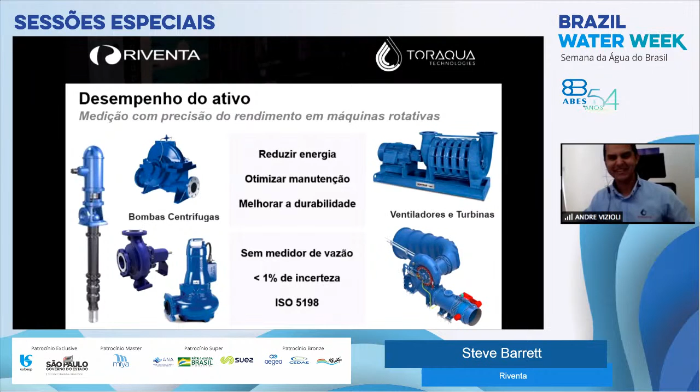But our great benefit is the level of certainty that our test has. We have a lot of accuracy. We can be very confident in what we are delivering. I can tell clients that after I measure, I'm 99% sure what has been done. This is very helpful in decision making.

I'll show all slides. This is the main challenge we face. A major portion of our clients already familiar with hydraulics and energy are struggling because we know that 90% of the largest cost of any water operation here in Brazil is power, electrical power. When it's not 95%, it's 70%. The main consumer is usually a pump. We know pumps are the main users of power.

So what do we do? From our experience, we know that our clients know how much they're paying. They go into the free market, try to reduce the rates they're paying, and they have mastery on that. When we go one level beyond that and think about stations and plants, due to energy metering, we don't know if we're measuring the wastewater treatment plant or the pumping plant, so you're not quite certain of the power consumption. And if I go up yet another level, how much is the pump, in fact, consuming in terms of power? How efficient is it? Usually we don't get an easy answer.

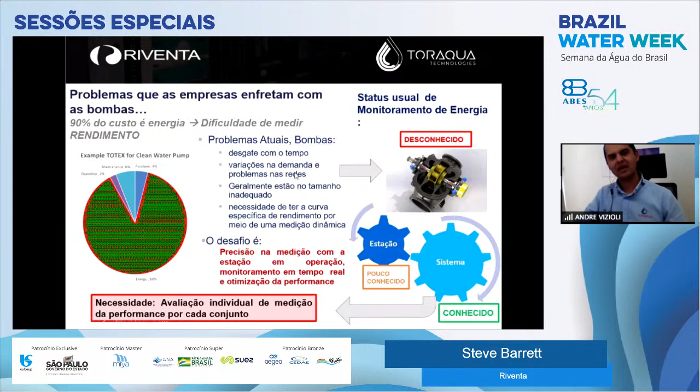So the result of all these variables that are kind of obscure in our daily operations is to individually assess the high pressure pumps, the water pumps, because the benefit is reducing the consumption of power.

We have several types of measurement. We use the conventional method, which is provided by all pump manufacturers. They measure power, they measure the flow, the height, the manometric height, and these are measurable variables, and the others are constants. This is done in a controlled environment. It's easy to do. They have mastery of it.

Doing this in the field is not as easy due to issues of accuracy. The accuracy you need, and you go to the operating side, you have to turn off the pumps because you need a single piece of data in terms of flow. This makes it so difficult that clients are not trying to do it. It's so complex, you bring together 3 or 4 teams to get it done. You need to measure it in operation, make the test available, reduce supply, and this might make it unfeasible.

Our experience shows that clients do not perform this type of analysis. And it's so important, since it's very important in terms of power consumption. And we know that pumps represent a large portion of the energy.

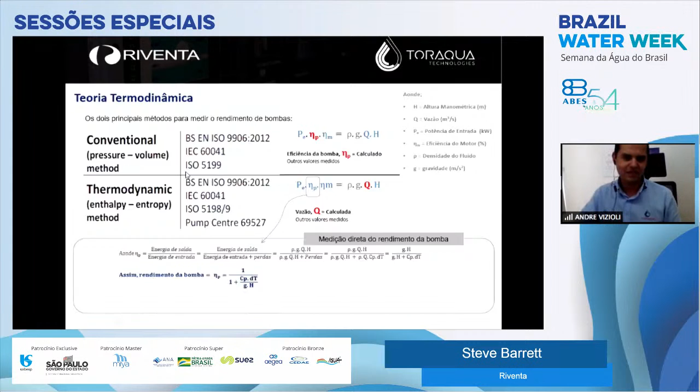We install everything in parallel, the power meter. This is easy to do in the field, and it's quite accurate. We measure the motor yield, and I'm measuring the pressure to get the yield. It's the same with the pump head, calculated by the software. Then I calculate the flow, measuring yield to calculate the flow.

So what is the result? We see pumps with a lot of wear and tear that have very low yields, under 40%. We've measured hundreds of pumps in our experience, and pumps are operating at 60 to 70% yield.

They could reach 85%. We have raised the banner with Riventa to talk to manufacturers and maintenance companies. We are moving forward with this idea, and we started to find out that pumps are very strong. They can operate out of their range and still work, but now we can identify that there is wear and tear, or that it's out of its range.

This is our range of products. We have a portable meter for predictive measurement to check pumps individually. We have the temporary meter. We can measure all pumps, analyze the curve for the system, and do analysis to optimize the plant. We can get a larger data cloud in a few weeks and work to optimize it.

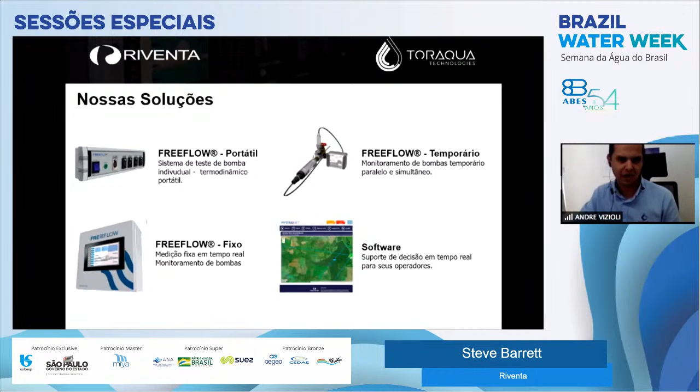So we have 2020 vision to reduce 20% of the electric bill from a water company. This is the view we have, and this is how we like to work, this is how we like to look. We focus 20% on the larger pumps with a goal of 20% reduction in the costs for power.

As I mentioned, we focus on OPEX, which are operating implementations, getting the pumps to have the best performance possible, alternating their mode of operation, and showing it so it's easier for the operator to be sure they're doing the optimal. In a second moment, with investment CAPEX, we start remodeling the pumps, replacing or rebuilding them.

In general, our methodology is identifying pumps that need to be refurbished. We provide power savings, and we maximize the durability of the asset by using preventative maintenance. This is something that goes by if we're not measuring. When we measure, we not only reduce the use of power, we also have more maintenance of the asset.

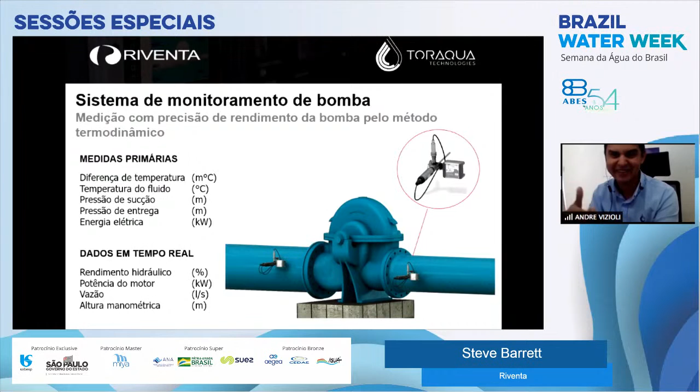So what are the primary measures? Temperature difference, fluid temperature, suction pressure, delivery pressure, and energy input. What is the data you will get in real time? You can get the hydraulic yield individually from each pump, which is the great trick to get that on the operating pump. This is how we can save on maintenance. The power of each pump, of each motor, the flow rate, and the pump head.

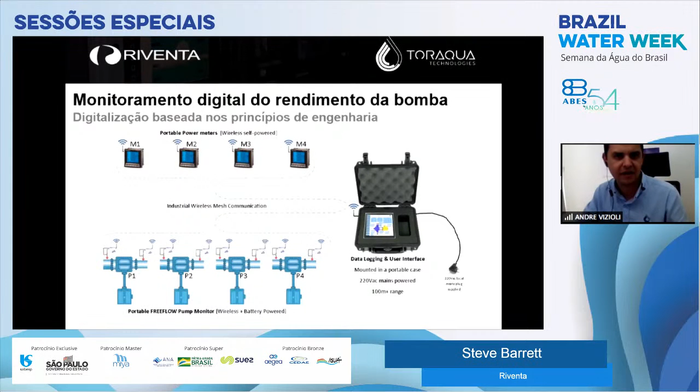This is a portable installation, so this does not require them to have the measurement permanently. For the client, we can take them, we can install the probes. I take it to a data logger. This data logger concentrates data, but it also sends to the cloud, so we can start working on our servers. Here's a picture of a fixed installation, or as real as possible.

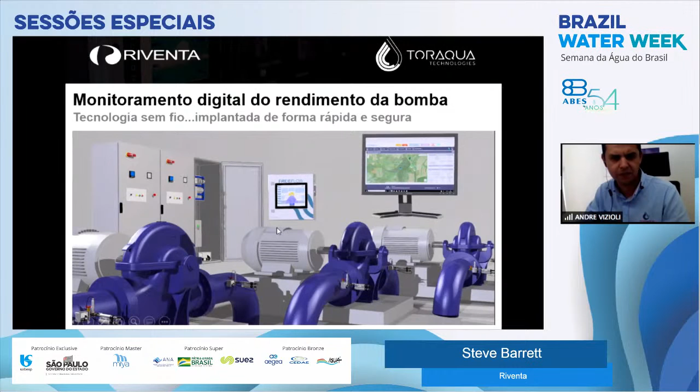The probes on the water pumps, the radios with the measurements - you can have that either on your station or on the cloud with the HidroNet software, everything by Riventa. You would have a login and password to get all the information, and also when it comes to the operation of these stations.

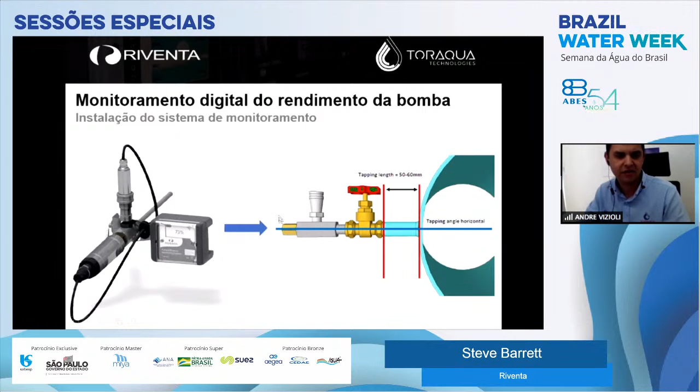A few more details: we have tapping on a valve. There's no cables. We are quite flexible with the installation as well.

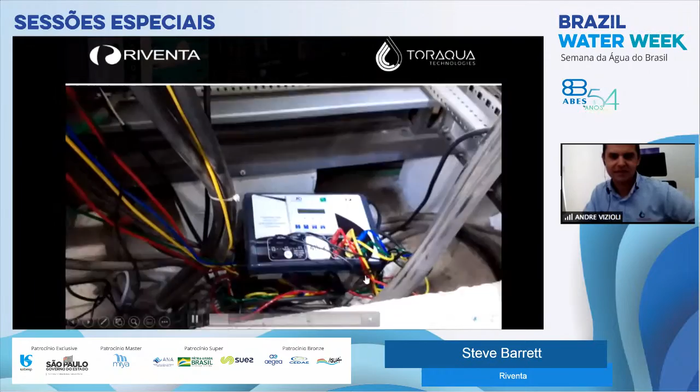This is a very brief video I'd like to show, and so for any questions - this is a power meter installed in the panel with a radio communication. This meter is sending information to the data logger, as I mentioned.

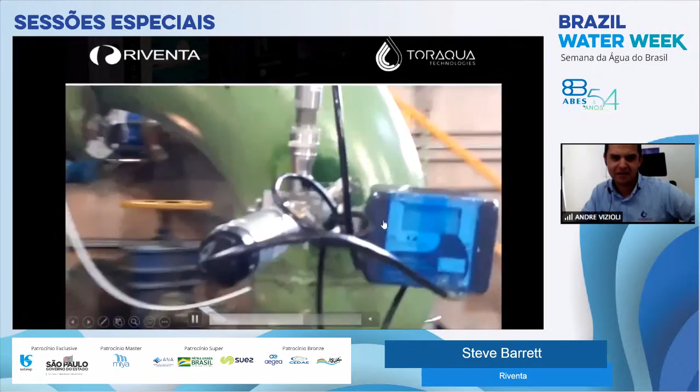I'll just skip ahead a little bit so you can take a look at the equipment. You can see how simple it is. Here is the installed equipment: radio, the probes, as I showed in the picture. The setup is really easy, really simple.

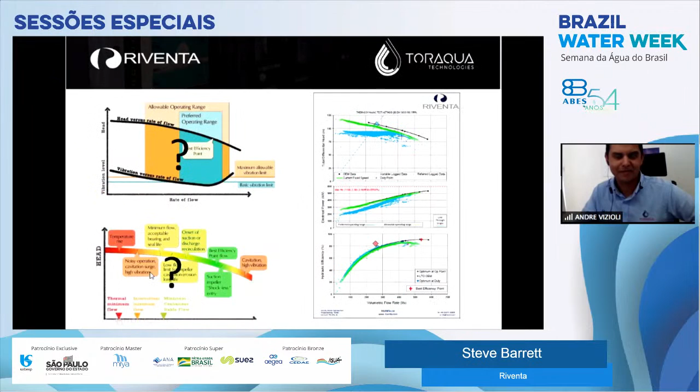But why should you do this? The idea is to identify what you see here. On the left, I wanted to show the pumps - they are not in an optimal operating range. We try to get the pump to remain in that range, the optimum range.

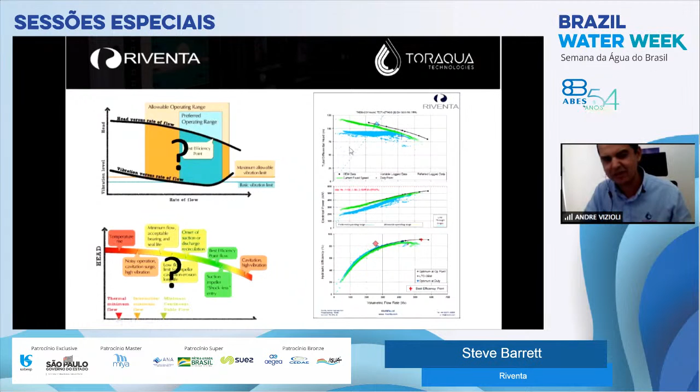What our measurement identifies is these green curves. We can see that they are not operating at a single point. On the left I'm showing the ranges they can have when they go beyond the optimal point, or the point that is being specified here - it is inefficient. This is our measurement. We can notice that this pump, a lot of the time, is outside its optimum range.

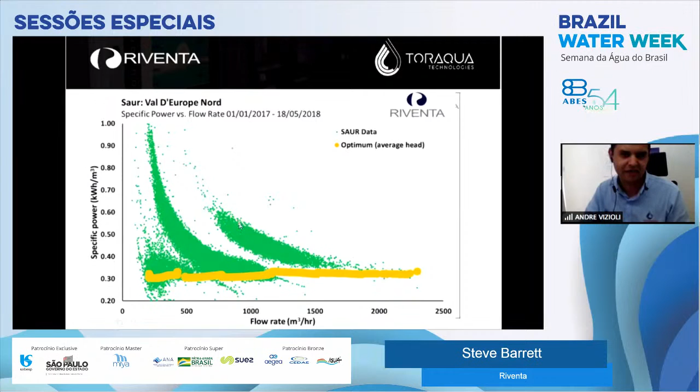This is the consequence of one pump. When I look at the whole system, I have a mass of data we could use. This is a graph in kilowatt-hour per cubic meter. So when we start optimizing and using this, I can drastically reduce the pumping costs, so all this green mass will be closer to the yellow portion.

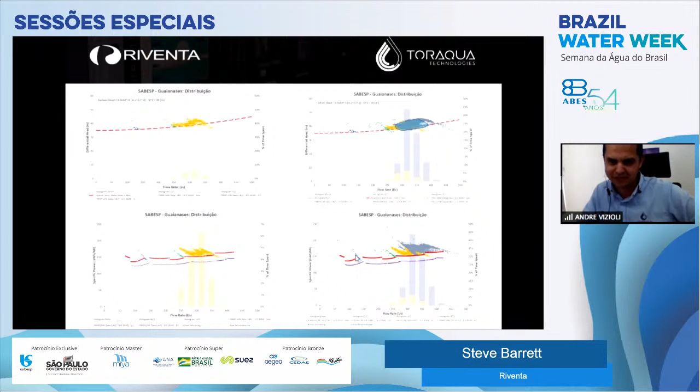Here I have another example as well, from Sabesp, very similar to what you're seeing here. I'll go a little deeper into this detail, but I'll be quite brief. On the y-axis we have the kilowatt-hour per cubic meter per flow rate. You see that the client here could operate in the red range, but is operating... you could operate in the red or the purple. That's what we identified there, with an increase of 12%.

Excuse me, André, I had to do that, but you have only another couple of minutes.

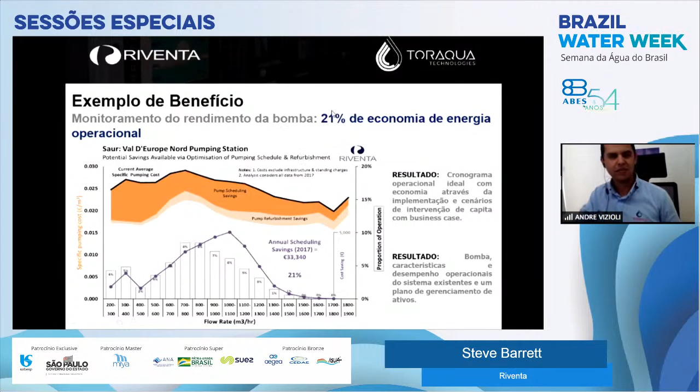Matter of fact, this is very similar to that graph I showed you earlier from Sabesp. In France, you can see specific numbers by flow, and from work that was done by us, 21% in energy savings - very similar to what we did here, except that it was operational there, not on capex. So it's a little bit more over the system.

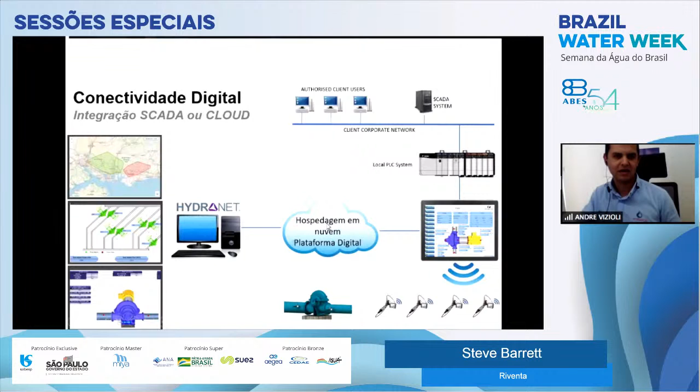You can have it fixed, like I mentioned, it's structured, and it can be turned on like that. You can plan, manage it, monitor, and then launch a report, and that can really solve a lot of your energy consumption problems. So I'd like to thank you.

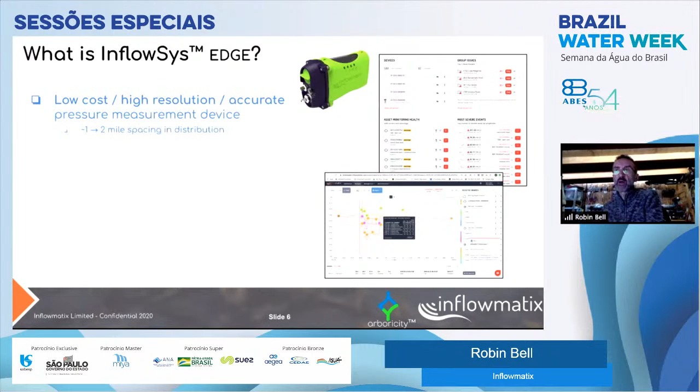These are distributed in distribution systems in 1 to 2 mile spacing, and in trunk systems in around 3 mile spacing. They're very fast and easy to deploy. There's no peripheral equipment, no additional equipment required. It takes less than 5 minutes to go through a sequence to get these connected to the water network.

Why do we call it Edge? The Edge provides intelligent, autonomous analytics. The analytical solutions are on the device, and this differentiates somewhat from the competition. What we wanted was to have that capability close to the edge of the network rather than relying on our cloud-based solutions. This gives us some advantage in speed of response and reacting to situations in the network. As I mentioned, we have this cloud-based application to give these insights via what we call a network narrative. You can see a couple of quick screenshots on the right from our application.

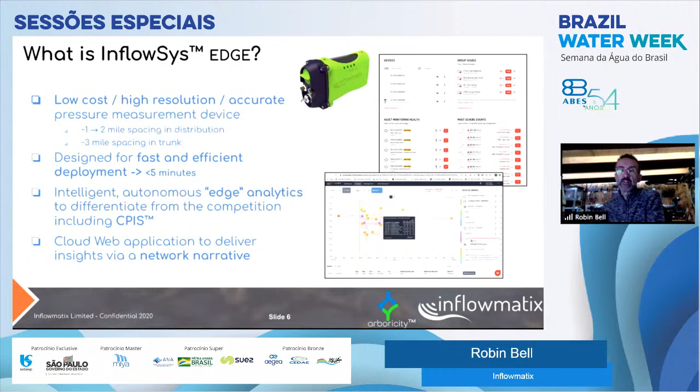Moving on, some indications of what we do: event alert reporting. This gives instant feedback on what is happening in the network. Managing those events is very important, because what we believe very strongly in is providing outcomes to our customers, not providing lists of thousands upon thousands of alerts, which really get ignored. So it's very important to give good management.

We integrate into corporate systems at whatever resolution a company requires. This means that rather than relying on our systems as a scale up occurs, the company can use their own systems to bring the information from this and other attributes into play. We're very skilled at doing those integrations, and we've done very many, particularly over the last 2 years.

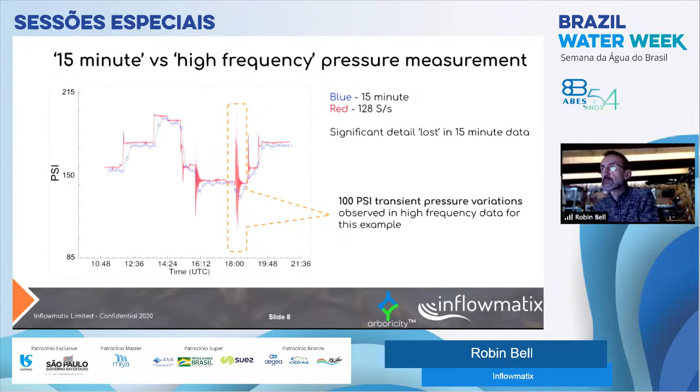So I've shown this in PSI. Similarly, in meters of water, this is around 70 meters of water. But those are lost with standard telemetry.

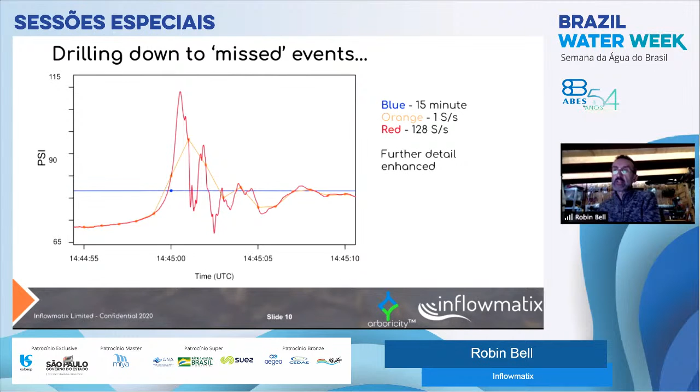Also, just using 1 sample per second data provides some information, but actually you need the full resolution by oversampling at 128 samples to reconstruct a waveform. This could be a typical pump surge type effect that can easily be created and needs to be seen to be understood and corrected.

So we have this metric CPIS, and I'll come on to define this in a little bit more detail. However, in doing burst correlations, typically customers around the world, water utilities around the world have used age, material, climate, and soil information to feed into those burst correlations. More recently, pressure, mean and maximum pressure have been used in those assessments, those models.

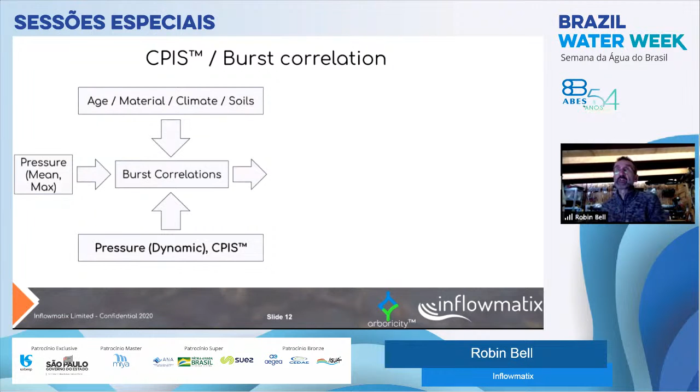What we bring is dynamic pressure variations in this metric called cumulative pressure-induced stress, which is a way of us accumulating the pressure information into a useful metric which indicates performance on the network.

So what was very interesting for us, we showed a correlation between the high volatility in the pressure domain in the network with burst records from over a 10-year period. It shows that although water systems change, the correlations remain in terms of those high pressure dynamics. So it's a very important element of understanding how water networks are performing. Obviously, we're trying to drive those down, and you can achieve orders of magnitude improvements.

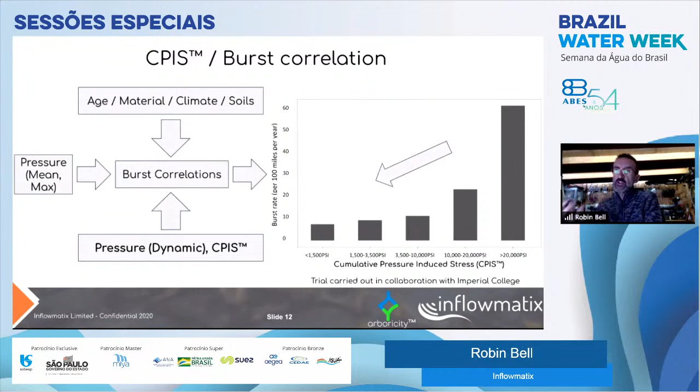So just a quick illustration before I go into some case studies. What are we doing that's different? We're gaining insight from analytical solutions. What we believe fundamentally is network hydraulics are the key to understanding how to resolve problems. We don't rely on just artificial intelligence. This isn't about lots of data sets, it's about the right data sets to get the right outcomes. We continue to work closely with Imperial College, one of the top 10 universities in the world, and we have a number of strategic partnerships. Suez has a minority interest in Inflowmatix, and we collaborate on these network solutions across a significant network for them, over 200,000 miles, 300,000 kilometers.

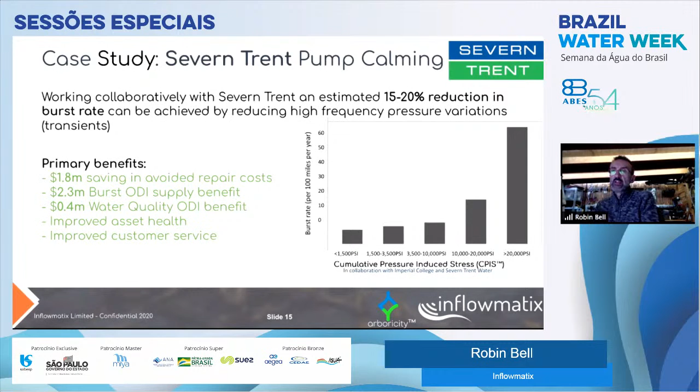So I'll talk about some of our use cases here. I showed this plot before of Severn Trent, and we did some pump calming activity with them, and we showed huge benefits. I've shown these in millions of dollars as an equivalent to the UK pound, and this was presented to the board of Severn Trent, and they saw the benefits and continued the rollout of our technology.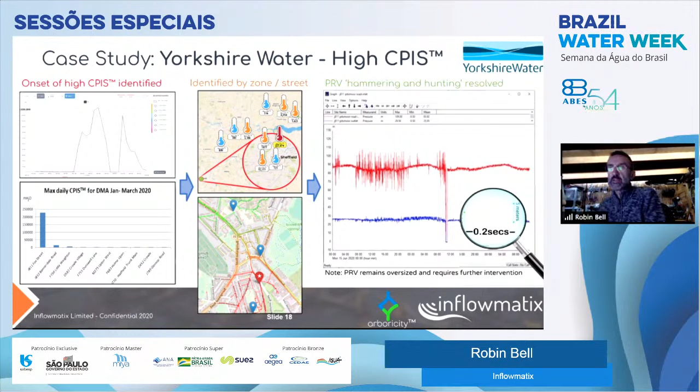Thank you. So this illustration shows where we were able to show in the network the onset of high cumulative induced stress. This shows 220 PSI variations in the network over a 24-hour period, an accumulation of smaller variations or some large variations in dynamic activity. The network was working fine, and then at a certain point this cumulative pressure-induced stress was seen to increase dramatically. We were able to work with Yorkshire Water to identify the zone where this was happening in the north of England, then use accurate time stamping to localize this down to a particular street. It was identified as pressure reducing valve hammering and hunting. This was resolved, but not fully, because looking very carefully at variations in the network using this high frequency, you can see there are still variations which need to be mitigated. But the major issue was actually resolved here.

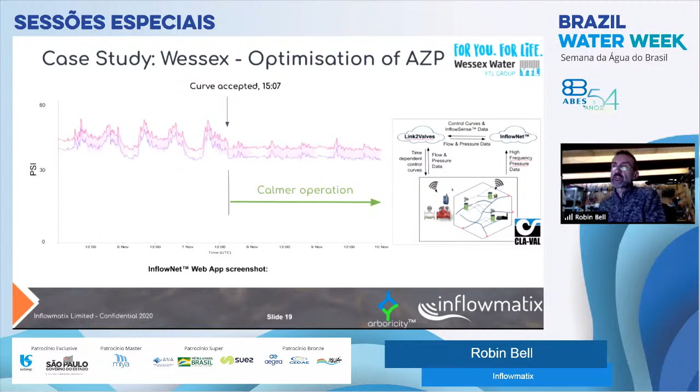We have another case study here. I'll just show this quickly, where by implementing, in conjunction with CLA-VAL, a control curve, we were able to achieve calmer operation from the network, which wasn't seen beforehand. This could be achieved by multiple devices in the network, giving robust feedback in terms of the volatility in the network and then using that information to apply a control curve. I don't have time to show this testimonial, but maybe we can circulate these slides afterwards - there is a testimonial from Suez here.

And we also have a case study, which I'll try and demonstrate. You may hear the sound. If this doesn't work, I'll abort. But in fact, it doesn't work in this particular case. But actually, maybe I can try again.

Here we go. So this shows a pump operation, and the pump will kick in a few seconds' time. You heard it turn off there, it was particularly noisy. I'll just move this on a little bit. So the pump is about to kick in, and visually you see the vibrations. It's probably difficult to pick up on the video, but you hear a phenomenal effect of pump surge.

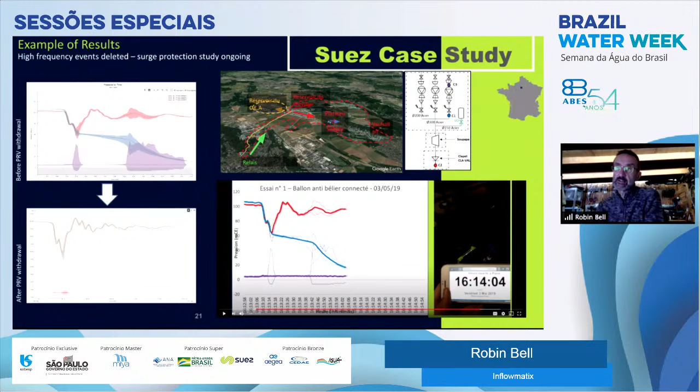So these are the kind of things to mitigate. You can also see the build-up of the pressure variations in the high-frequency domain. Unfortunately, you don't hear it in full volume. If you were actually there in person, it's a huge impact. It gives a true indication of how these pressure variations cause physical impact on the network, which damages assets.

So my last slide really, I've tried to demonstrate in the short time we have how dynamic pressure variations damage assets. We know that CPIS is a unique metric, which is the first step towards resolution. It involves intervention, but it provides the information to do that intervention. We have the ability to calm networks, working with Suez, working with CLA-VAL, and working with other partners. What we like to do is collaborate with the customer to understand the problems they have, so we can solve these with a focused discussion. We have an ability to sell what we call starter kits to get deployment underway with our customers and initiate the first stage of engagement to really understand how we can help resolve those problems in the network.

So thank you very much. My contact details are there if you wish to get in touch with me, and thank you for the time today. Hopefully there are some questions.

Well, thank you, Robin. Very interesting presentation, and I'm sure that people will contact you and ask you questions about this starter kit to start exploring your technology. I have a question for you. You have mentioned a few times the CPIS metric and correlations with, for example, burst correlations and so on. Why is this metric so important to understand the state of the water networks?

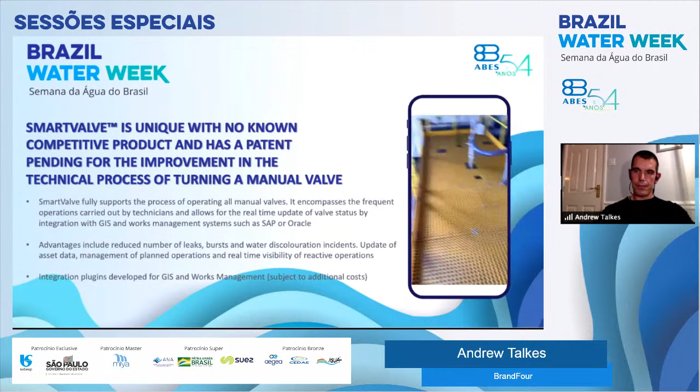So that video there showed me on the transient rig with smart valve in one of the early stages. That actually was a good example of not following the guidance on the device. The guidance was there and it was ignored by the technician, because this is a closed environment on their transient rig. You saw as it went over to the pressure monitor, you could see the big spike in pressure, similar to the ones that Robin was showing. So this is the effect of closing down a valve too quickly. Our smart valve system was saying, hey, you're going too fast, I'm beeping, I'm flashing at you, I'm telling you you're going too fast. It was ignored for effect just to show the results. So that's what happens in the real world if these valves are turned in ineffectively.

So here's another example. Here's some data we took from our early trials with Anglian Water. We can turn off what we call our monitoring, so our calm network monitoring off, and we gave the smart valve to the technicians, who have been working for Anglian Water for a number of years, very experienced. Their calm network training would say, you turn the valve at 80% of the time at one speed, and the critical part, usually the closed part or the open part, at a much lower speed. That's how they've been trained.

So we gave them smart valve and told them to record their valve operations. This was the profile we got back for the first few operations from one particular experienced technician. Now you can see there's no potential drop-off there in terms of the turns. We should see turns at one speed and then a drop-off to a much slower speed as they come to complete that close operation.

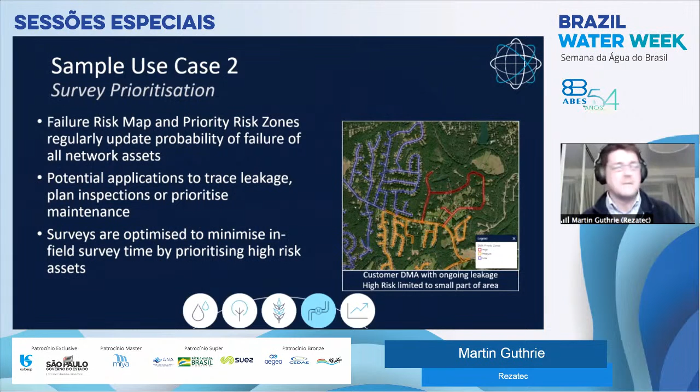So that's my presentation, hopefully I'm in time. My contact details are here. If anyone has any questions, I'd be happy to answer.

Great timing, Martin, thank you very much in spite of the few technical hiccups at the beginning. Since you mentioned something about cost, I was wondering how do the costs scale for large cities? For example, if you have a city which is 10 times bigger than a smaller one, what happens with the cost? Is it also 10 times higher?

No is the short answer to your question, Blanca. Satellites are passing over the surface of the Earth all the time, they capture all of the data anyway. It doesn't matter to a satellite whether it's a small city or a large city. So the only extra costs involved are the processing and storage of data, but those are not particularly high. So basically, as an area increases, the cost per square kilometer decreases. It gets cheaper per square kilometer as we get bigger and bigger.

Okay, fantastic. And the other question is, imagine somebody listening to us would like to know what would happen if they want to do a pilot now in Brazil or wherever they are from, since this presentation is being broadcast widely on YouTube. So the question is, how quickly can you start generating results and analysis? Once you start speaking with a potential client, how long do you need to wait for the data you need for your analysis? Is it a year's worth of monitoring? How long is it, and what information do you need?